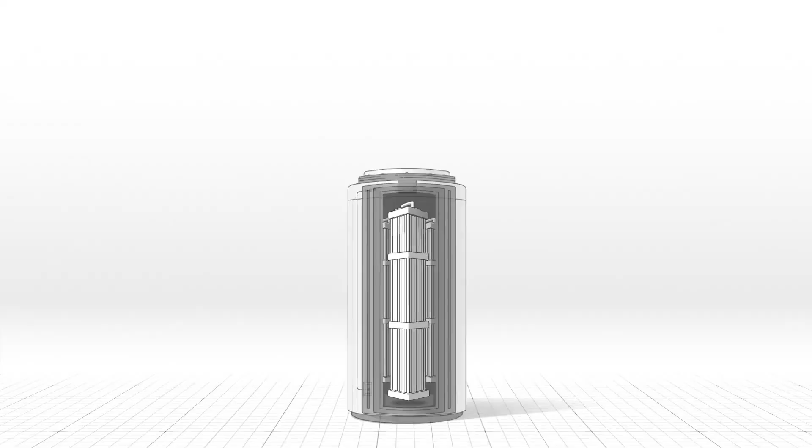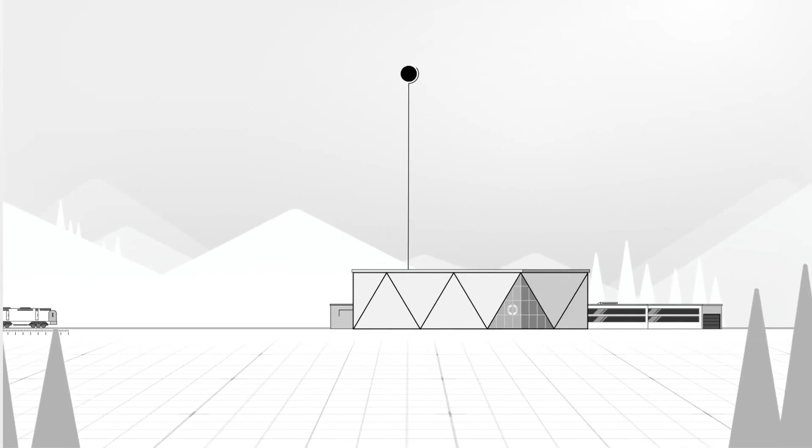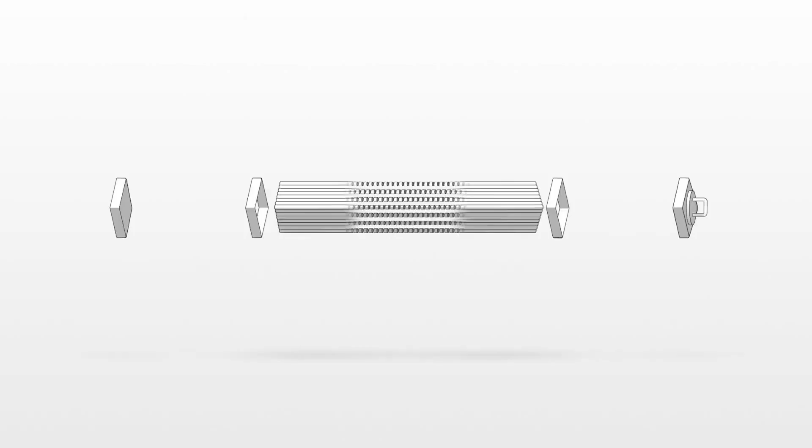Nuclear power is growing into a multi-trillion-dollar value globally because of the world's energy shortages, which need to be met, largely due to rising electricity demand from energy-hungry data centers, the AI boom, industrial growth, and electric vehicles. Estimated global nuclear capacity would need to triple by 2050, with more than $3 trillion in investment expected over the next 25 years. Interest in nuclear energy is growing, supported by policy momentum, shifting public sentiment, and the search for clean, reliable power.

Small modular reactors, SMRs, are a key technology, offering faster, cheaper deployment compared to traditional nuclear plants. Companies like NANO Nuclear, NuScale, and Oklo are leading the charge, with plans to bring SMR-powered energy to market by the end of this decade.

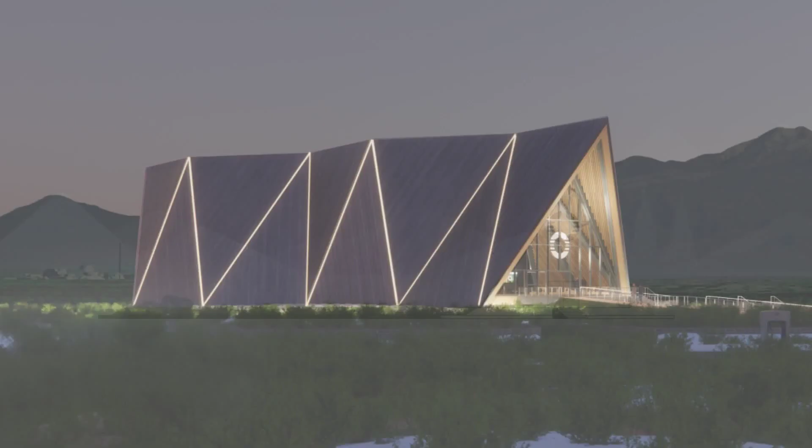Oklo's differentiation lies in fuel recycling technology to power its own reactors and build up the American fuel supply. To this end, it plans to build a nuclear fuel recycling facility in Tennessee, which would be the first privately funded operation in the U.S. to recycle used nuclear fuel, with an investment of up to $1.68 billion and creation of over 800 jobs.

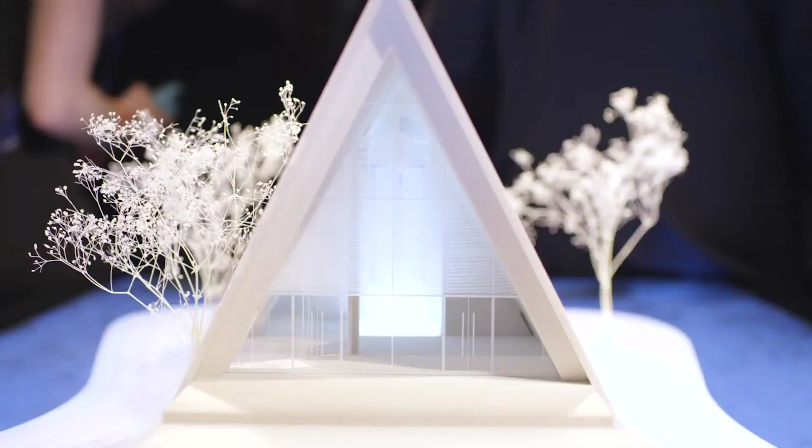The facility is expected to begin producing metal fuel by the early 2030s and will recycle used nuclear fuel into fuel for fast reactors, including Oklo's Aurora powerhouse. Oklo is also exploring collaboration with the Tennessee Valley Authority to recycle used fuel and evaluate potential power sales.

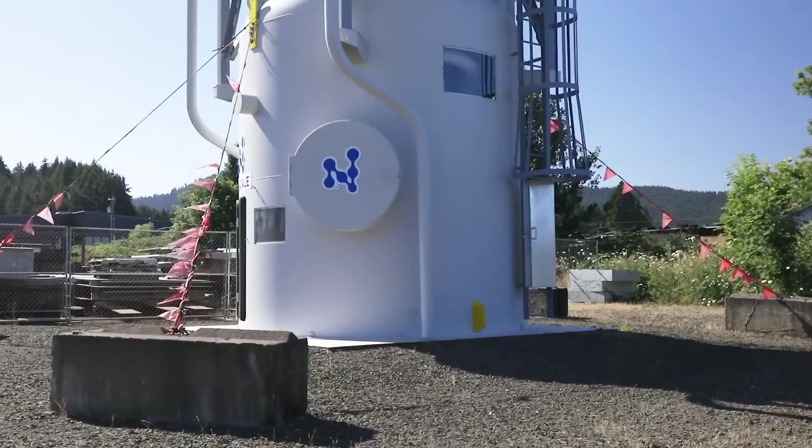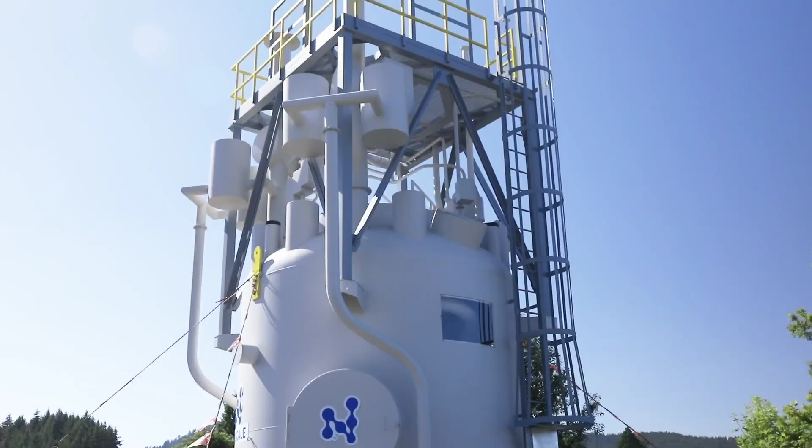NuScale Power is also contributing to SMR proliferation and commercial viability. By Q2 2025, the company posted a 733% year-over-year revenue increase, reaching $8.1 million. However, it's important to note NuScale and its peers generally continue with lack of profitability and low price-to-book ratio as they continue to develop their technology and gain regulatory approvals on their way to widespread market acceptance.

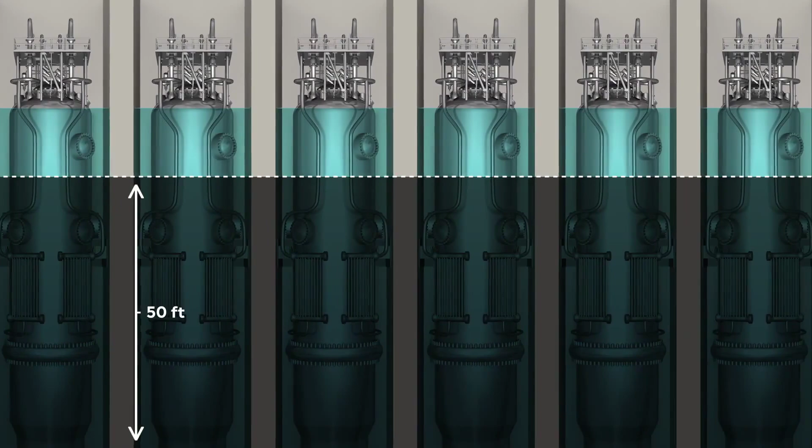Though technically speaking, its position in the nuclear energy sector was further strengthened by receiving a second NRC approval for its 77-megawatt SMR design, which has increased customer interest. NuScale's technology is also being applied to water desalination and hydrogen production, broadening its market potential.

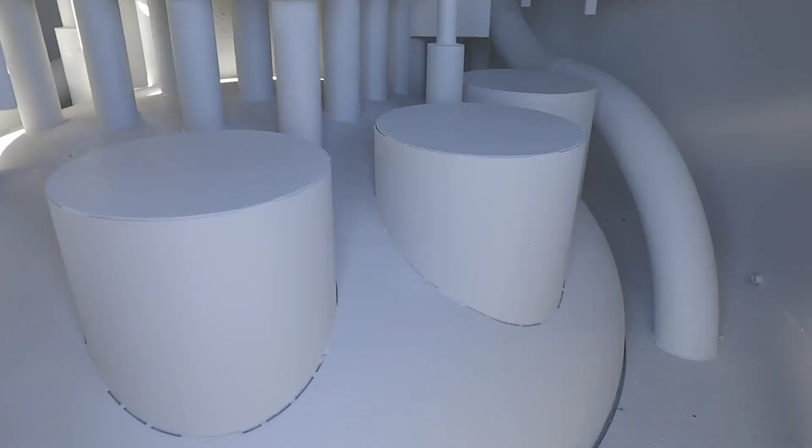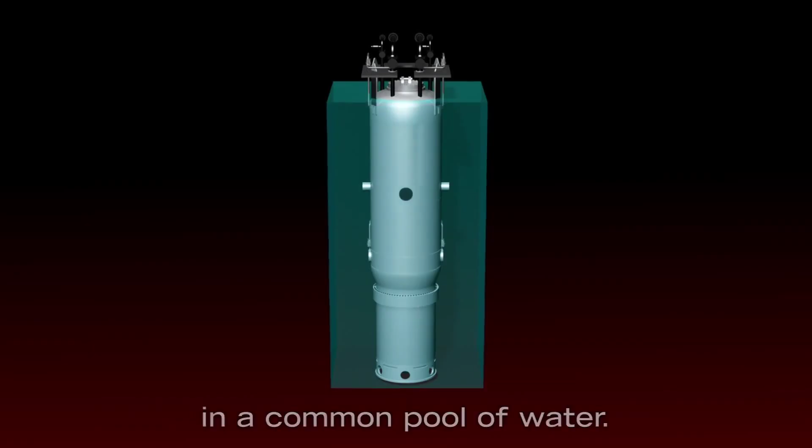Key partnerships with firms like Doosan Enerbility and ENTRA1 Energy have advanced its manufacturing and commercialization efforts. A major milestone was NuScale's support of ENTRA1's agreement with the Tennessee Valley Authority to deploy up to 6 gigawatts of SMR capacity, making it the largest SMR program in U.S. history and targeting carbon-free electricity for sectors such as AI and semiconductor manufacturing.

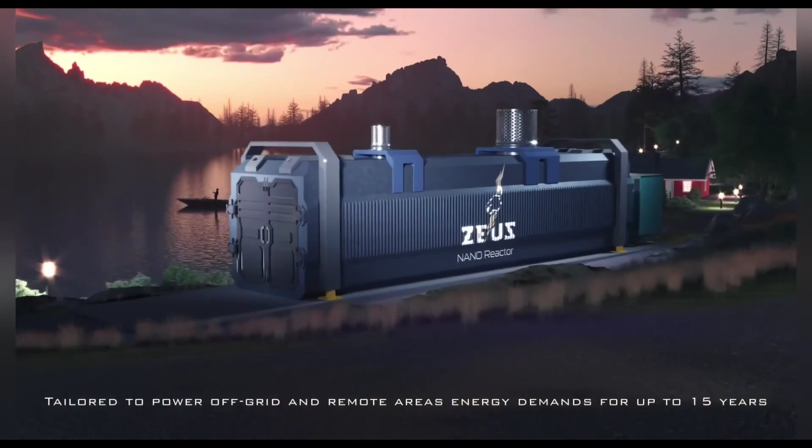Similarly, NANO Nuclear Energy gained ground by securing a $1.25 million contract from AFWERX, the innovation arm of the U.S. Air Force, to develop its Kronos MMR energy system, a stationary, high-temperature gas-cooled microreactor designed to generate 15 MWe of carbon-free power with long-term operational potential.

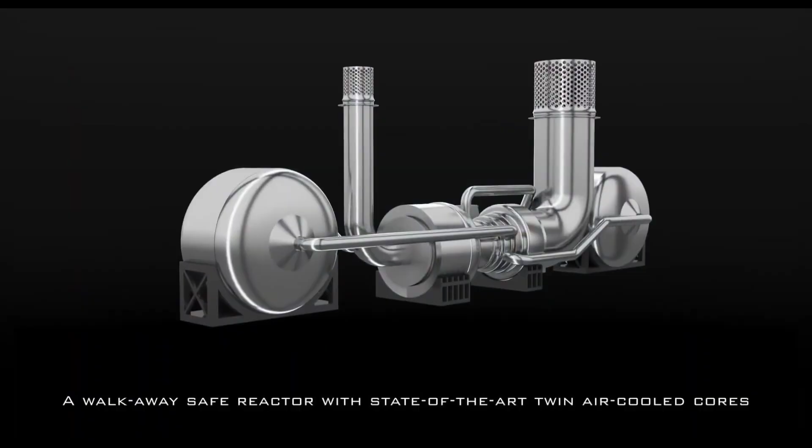The system, which uses TRISO fuel and passive helium cooling, is designed for microgrid independence, cyber and physical resilience, and mission-critical operations. This contract signals growing U.S. defense interest in deployable, secure, and carbon-free energy sources, particularly for bases and forward operating environments.

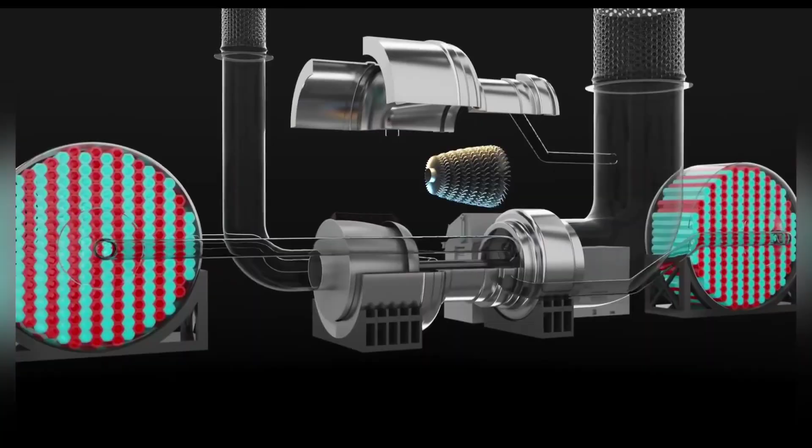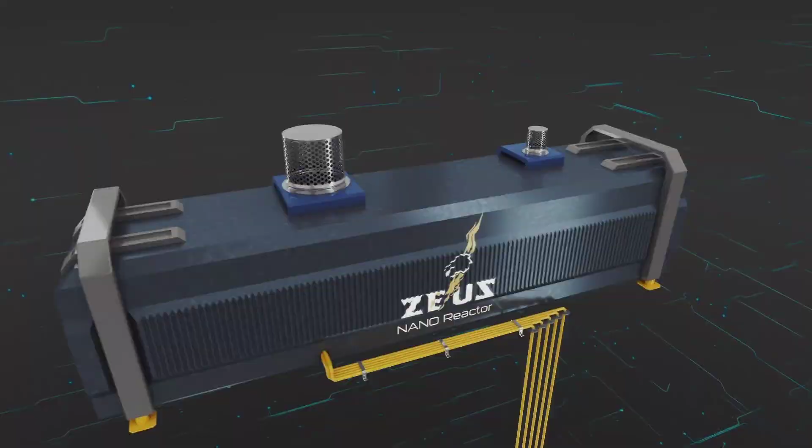CEO James Walker called the deal a validation of Kronos MMR's energy assurance role, especially with its modular flexibility. This defense partnership places NANO Nuclear among a select group of microreactor developers with direct ties to U.S. military projects. The company is also working on complementary technologies like Zeus, a portable solid-core battery reactor, and Loki, a space-based reactor, while simultaneously advancing HALEU fuel transport and fabrication infrastructure, an essential but often overlooked hurdle in nuclear deployment.

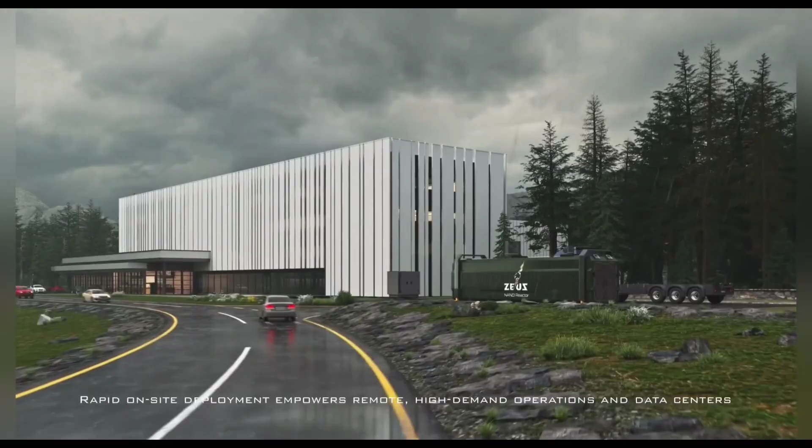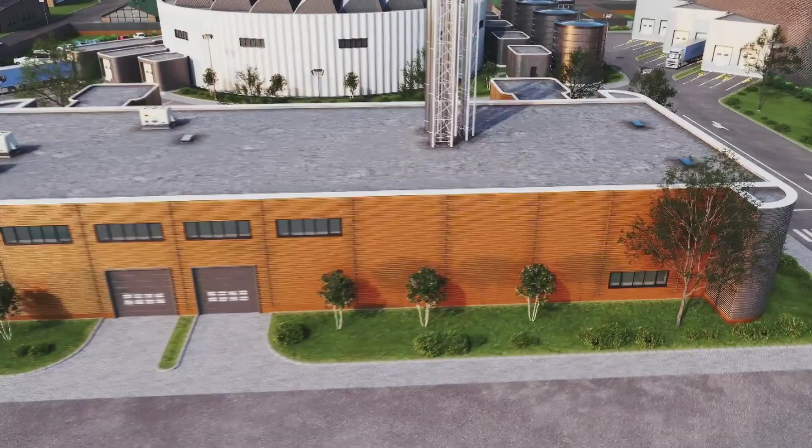NANO Nuclear also signed a landmark 10-year Cooperative Research and Development Agreement, CRADA, with the U.S. Department of Energy's Idaho National Laboratory, INL, to accelerate development of its Kronos and Loki microreactor programs. By leveraging INL's expertise in reactor design, materials testing, licensing, and deployment, NANO Nuclear seeks to advance commercialization of modular, clean energy systems for defense, government, AI data centers, and commercial applications.

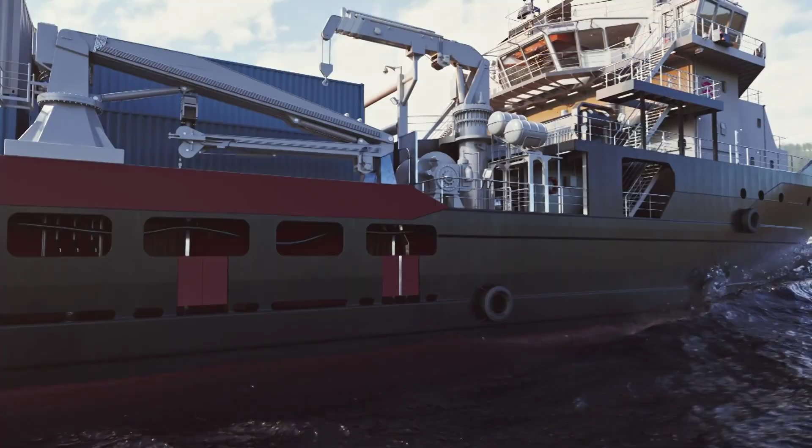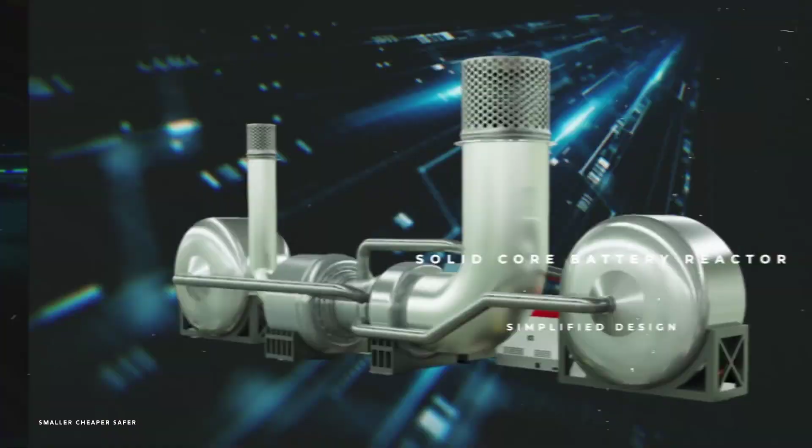As part of a strategic portfolio realignment, the company also announced a proposed $6.2 million sale of its Odin low-pressure coolant microreactor design and intellectual property to Cambridge Atom Works, a UK-based advanced reactor developer. This deal includes a $250,000 non-refundable down payment and a $5.95 million payment in 2026, with future royalties based on net sales. The sale allows NANO Nuclear to concentrate on its gas-cooled microreactors Kronos, Loki, and Zeus, streamlining development and regulatory efforts while aligning with the recent US-UK Atlantic Partnership for Advanced Nuclear Energy.

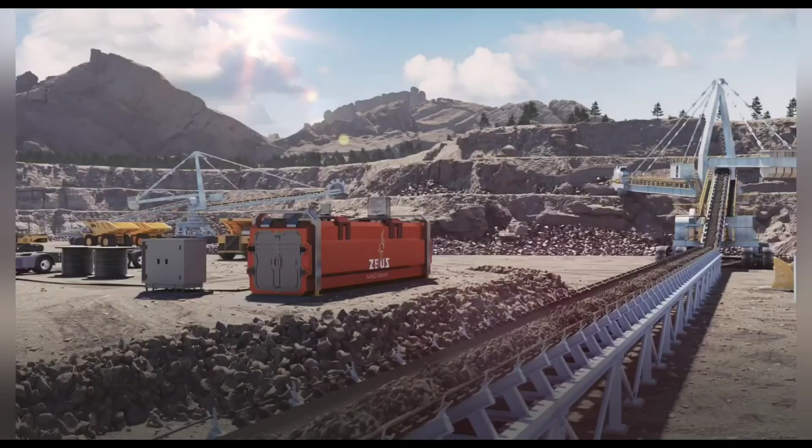NANO Nuclear emphasized Kronos MMR as its flagship technology, capable of gigawatt-scale power in multi-unit configurations. The company is actively working with the U.S. Nuclear Regulatory Commission, via the University of Illinois Urbana-Champaign, to license Kronos in the U.S., while also pursuing development in Ontario, Canada. A recently acquired engineering and manufacturing facility in Oak Brook, Illinois will support construction, testing, and deployment across North America.

The decision to retain Loki and Zeus is strategic, as both reactors share core technologies with Kronos, creating synergies in design, regulation, and supply chains. This integrated approach is expected to improve performance, reduce costs, and accelerate commercialization. Company executives view the Kronos program as a foundation that will directly benefit the development and market readiness of Loki and Zeus, while the Odin sale is expected to close by the end of 2025.